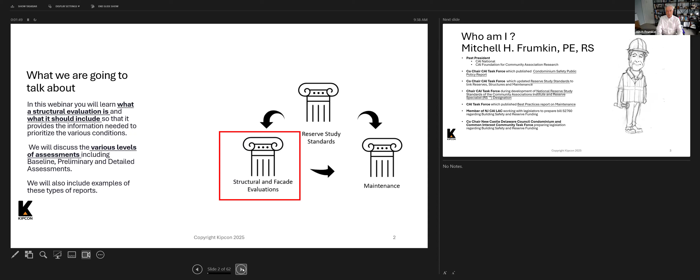Now, this is one of the new little things I added. I don't know if you recognize that, but that's me standing there.

A little bit of my background: I'm past president of CAI National, past president of the Foundation for Community Association Research, which I'm also still on a committee with. When Champlain Towers happened and the collapse took place a few years ago, CAI immediately put together a national task force to develop public policies on condominium safety. I was one of the co-chairs of that, the only engineer actually who was one of the chairs. We involved over 600 people from around the country in developing the public policy on condominium safety, which has been updated by CAI, and I actually chaired it when it was updated. I could talk about that if you like. But when it comes to New Jersey legislation, and legislation in most states that I know of that I've been involved in, it's generally based on the CAI public policy on condominium safety. So it's a very important report, and we will send you copies of it, or you can download a copy from CAI National's website. It's a pretty extensive document having to do with condominium safety, and again, it's the basis very much for the law in the state of New Jersey.

When we put together the public policy on condominium safety, we all came to the conclusion that the reserve study standards needed to be updated to reflect structural integrity as well as maintenance. So the reserve study standards were updated to reflect that. I was one of the chairs of the committee that also updated the standards. If anybody would like a copy of those standards, we can send it to you. Again, you'll see in the legislation in New Jersey, and every other state that I know of, when it talks about reserves and reserve funding, it refers to the CAI reserve study standards as the standard to be used. So there we talk about the reserve studies.

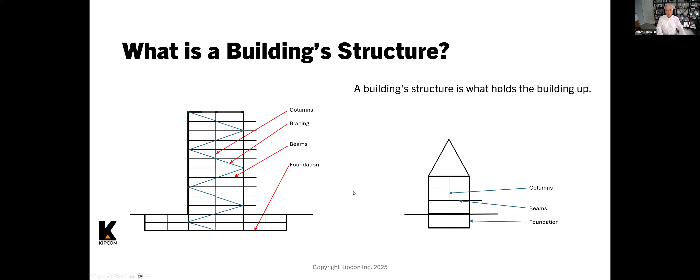There's bracing - these diagonal little blue guys are bracing, and what that does is keep the building from blowing over if the wind blows. So picture the wind blowing from the side - this bracing takes the wind forces down into the ground, these horizontal forces, and into the foundation. The columns are the vertical parts of the structure that hold up the floors, hold up the roof, and hold everything together, bringing the forces down into the foundation. So that's what the building structure is - it's what holds up the building.

The legislation says which buildings - because the big question always comes up is, does my building need to be covered and inspected based on this legislation? The legislation is based on buildings that have a primary load-bearing system, made up of certain material types. This is the actual wording for the legislation: it says that primary means the assemblage of components within a building comprised of the beams, the columns, the bracing, that by being connected to each other, take all the forces - like the weight of the building, the winds and things like that - to the foundation. So that's what it looks like. The primary load-bearing system - I'm going to show you some pictures of what it really means in real life - but it's the things that take the forces to the ground.

One of the things by definition - I'm going to add a little asterisk - is here it says balcony. By definition, a balcony is not part of the primary load-bearing system. But based on the collapse of the balcony in Sea Isle City and the problems with balconies found everywhere, we were able to change the legislation to say that the primary load-bearing system does include the balcony. So even though by definition it's not included, it is included based on legislation. The other thing you see here is the podium deck, and I'll talk about what that is - but the podium deck is included also as part of the primary load-bearing system. So keep in mind this terminology, because this is right from the legislation and right from the standards, which I'll touch on as part of the presentation.

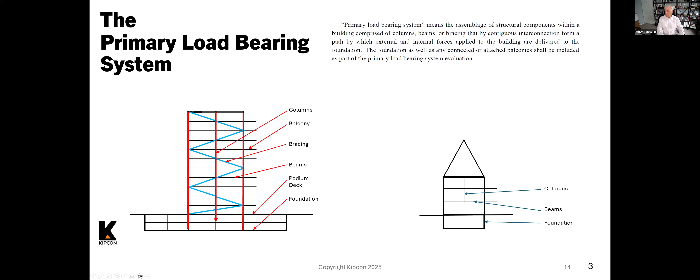Primary load-bearing system is a very important term. Now what does it mean? This is a steel building, and what you see is the walls weren't put on the outside yet, but you're looking at the primary load-bearing system.

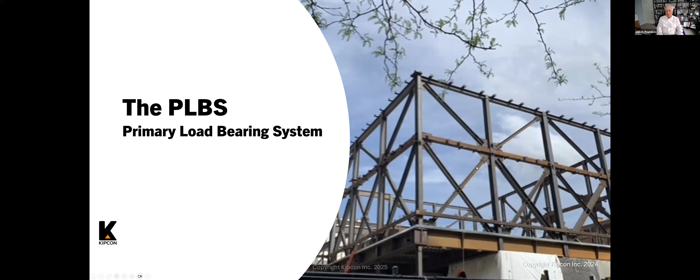You see the beams, the roof, what holds up the roof. You see this beam that holds up the floor. You see the columns in the corner and every 20 feet or something. And then you see the bracing, which is there for the wind load.

The key to a primary load-bearing system and why it's included in this definition is that the primary load-bearing system of the structure is based on the concept that if any one part of it rusts away or falls out or is not there, there's a possibility for a partial or total collapse of this building. For example, if this piece of wind bracing right here was not there and the wind blows, this top part of the column and this section of the building can collapse because just one part of the primary structure is not there.

Same thing with this column. Imagine what happens if this column is gone. This whole corner of the building will collapse. So if this column deteriorates over time and rusts away and loses its strength, there's a possibility that the corner of the building can collapse. And that's why when you're inspecting the primary load-bearing system, this is what you're looking for.

Then there's the beam. If this beam is gone, then the floor will collapse, and it's possible the roof can fall or other things can happen.

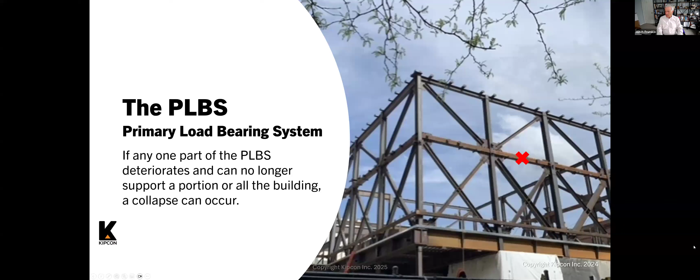But now the definition goes on further. I'm looking the other way because that's how I'm changing the slides now.

It says that a covered building, a building that's included in the legislation that needs to be inspected, is a residential condo or co-op building that has a primary load-bearing system. Remember what I just said? That's comprised of concrete, masonry, steel, or a hybrid structure, including heavy timber, and a building with a podium deck. I'll show you what these all mean in a second, but the key point here is that the type of buildings that are inspected are those that have a primary load-bearing system made up of these materials.

Now, there's always confusion about this, and for the person here from Florida, don't listen to me, but in Florida legislation, if I'm not mistaken, I'm pretty sure it says that the buildings that need to be inspected are 3 stories or higher. If you look at all the standards, which I'll show you, as well as logic, and if the person from Florida has anything to say, feel free to jump in.

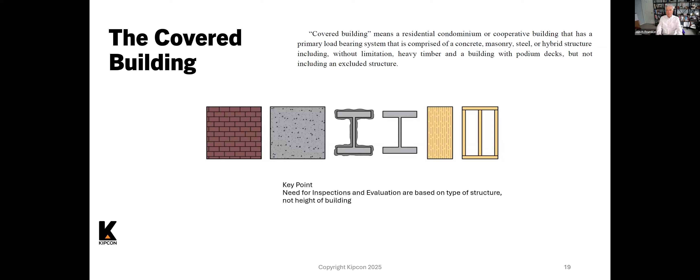The logic is if you're made up of these type of materials and you have a primary load-bearing system and it rots away, the building can partially collapse or collapse. So everything I've seen in every standard is not based on the building height. It's based on the materials of construction. So keep that in mind.

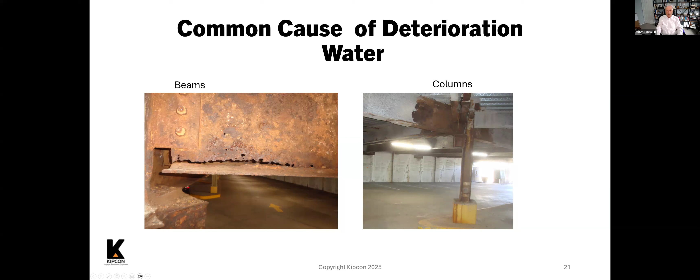Now let's talk about a concrete building. This is what a concrete building looks like under construction. Again, concrete and water don't mix when it comes to deterioration and structural problems. Keep in mind, for those of you who aren't aware, that when you look at a concrete beam such as this - I think this is in a parking garage - these concrete beams and columns are concrete, and encased in the concrete is steel reinforcing, it's called. If that steel reinforcing in the concrete gets wet, what happens is you build up corrosion. As it corrodes, it expands.

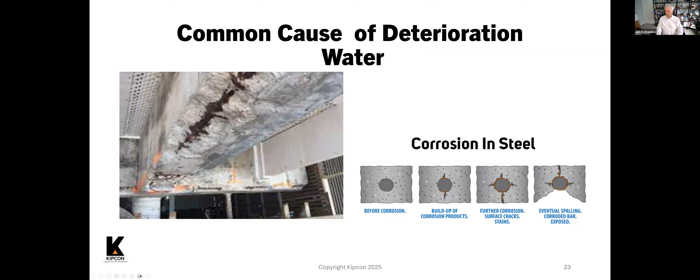As it expands, two things happen. It starts pushing on the concrete, which is called spalling, where it pops out of the corners or wherever because it's rusting. Also, the reinforcing steel loses its strength, so the beam itself is losing its strength. A very common cause of deterioration of reinforced concrete is water. You'll see that that's the common cause of everything. So this is reinforced concrete.

This is what wood looks like on the right when it gets wet and starts deteriorating. The picture on the left I had to add because I took it about two weeks ago. This is a 4 or 5 story building, all steel and masonry, but right in the middle they have a wood column that goes from here all the way up to the top, supporting the building. If you look closely, this wood is splitting from water, expansion, and contraction.

This building has about 20 of these columns, and every one of them is doing this type of thing. You can't miss it, you can see it. I still left my business card, but this is a different part of the country. This is just a picture I took a couple weeks ago to show the types of deterioration in wood.

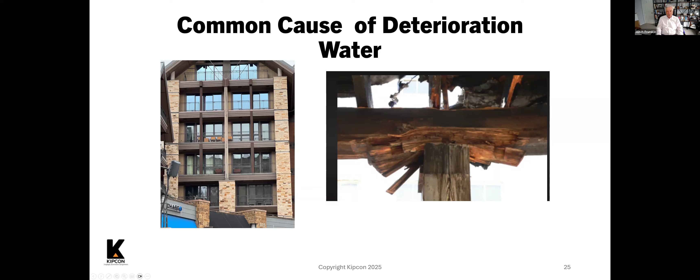Now let's talk about a podium deck. On the left you see an actual building. On the bottom it's reinforced concrete, and on top this is what's called stick framing, which I'll talk about in a second. A podium deck is essentially a deck like this which supports something above, taking all the forces, the weight, the wind load, and whatever out of the top structure and bringing it to the ground through the podium deck and the columns below it.

This question I've heard - as a matter of fact, somebody at Kipcon asked me about it a week ago, about a building Kipcon was inspecting: is this a podium deck? But this is the concept behind it. On the right you can see a little diagram, concrete on the bottom. A lot of times you'll see a promenade deck with pavers and a waterproofing membrane, where you have benches and planters and people sit outside. On top of the podium deck, underneath you often have a parking garage, and on top you have a building being supported by the podium deck. That's the basic concept of a podium deck.

Where do you see this most? You see it a lot in high-rise buildings, in different kinds, but most prevalently where you may have a parking garage. What happens on the podium deck is, on the left, water comes in - it may be brought in by the car if it's an enclosed parking garage, and it may have salts in it. You start seeing corrosion of the reinforcing steel, spalling of the concrete, and deterioration from water.

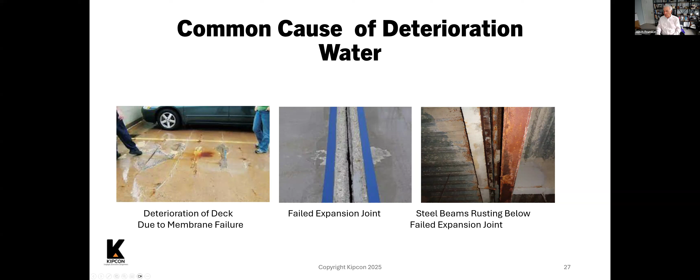Just replacing a closure on an expansion joint may cost you $1,000. Replacing the steel and fixing it will cost you $1 million. So that's because of a failed expansion joint, but it's very critical when you have expansion joints to make sure they stay sealed.

Here's another example. This is a driveway up to a condo, which is a podium deck with stick frame buildings on top - I'll talk about that in a second. There's a lot of expansion joints in that podium deck that water's been getting through, and they haven't fixed them over the years. Look what happens below: the concrete gets wet, starts cracking, and loses its structural strength.

Mitch, before we move into this, I don't know where the appropriate spot for this is, so I'm just going to throw it out - how does a post-tension cable system fit in?

Well, a post-tension cable system - the basic difference is that here you have reinforcing steel that, when you form the concrete and pour it into a mold or form, the reinforcing steel is just there and you don't have to do anything, it just sits there. Post-tensioning means you put in tubes with tensioning cables, and you put tension into those cables after the concrete has been built. By putting tension into the concrete, it's a different way of providing structural strength.

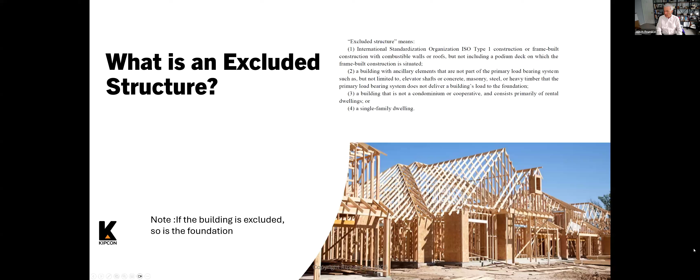But now I'm going to show you something - I don't know if I have another slide about it, so I'm going to go back for a second. If you look at this right here on the left, you have a podium deck made out of reinforced concrete at the bottom, and at the top you have a stick framed building. When it comes to structural inspections and what's included, in this case the bottom podium deck, concrete columns, and everything underneath it are included and do need to be inspected.

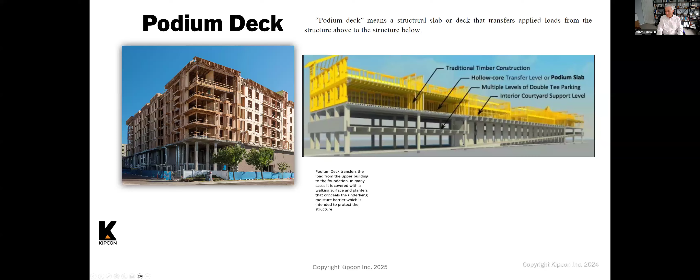What's sitting on top of the podium deck, this stick-framed wood structure, does not have to be inspected. Why is it critical to inspect the bottom? Imagine if this one little column in the corner rotted away - this part of the podium deck would collapse and take the entire building with it. So podium decks are required to be inspected, but the stick frame above is not. That's a question that comes up a lot.

Another term to mention is maintenance. Maintenance is absolutely important, and when it comes to legislation, there are three types. Preventive maintenance is proactive maintenance you do to make sure your structure doesn't deteriorate and that things on your reserve study last their full useful life.

As of right now, and it's not changing, the legislation says that when you do a reserve study for a building - and you have to do reserve studies for every association - the legislation is very clear: the reserve study must include the cost of preventive maintenance. That's in the legislation right now, and that's new to reserve studies.

Deferred maintenance is when you don't do maintenance - you just defer it and don't do it. Corrective maintenance is maintenance you do because you're not doing preventive maintenance, and things happen that you couldn't plan for. So if you're not doing preventive maintenance and you start having problems with the structure, you have to fix it - that's corrective maintenance. Also, as the building ages, you may not be able to plan for certain things happening. It just happens because it's aging, and then you go in and have to fix it.

That's corrective maintenance. The reason I put these here is, like I said, preventive maintenance needs to be included in the reserve study - that's a side point. But the legislation says that if a structural integrity inspection report includes anything having to do with corrective maintenance, something that has to be fixed, it's very clear that the cost of that corrective maintenance needs to be included in the reserve study.

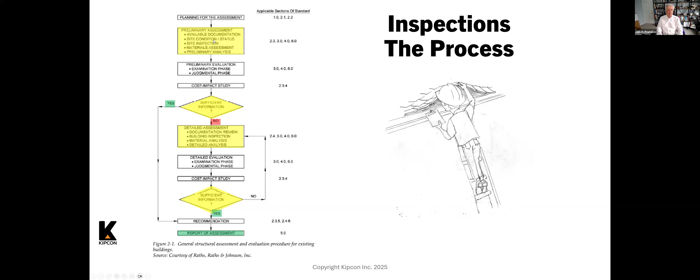The next step is to do a detailed assessment, where you may say to the owner, you have to take off that fireproofing from the steel so we can see what's going on underneath. If you do have sufficient information, you go to the 'yes' and put together the report. But in some cases we don't have sufficient information, and the conclusion in the report is that they have to do a detailed assessment. This is where the process comes from. The initial proposals from firms like Kipcon are based on doing a preliminary assessment, which is what those standards require.

So what is a preliminary assessment? This comes directly from the standard. It consists of a brief walkthrough, meaning you look at every place in the building where you can see where the primary load-bearing system is, either directly or through common elements where it's in the walls. You walk through the structure to identify visually discernible conditions of distress.

If you're looking directly at the structure, obviously you can see it. But if, like I talked about with the fireproofing, it's wet, or if you're walking up a stairwell and you know where the column is and see the sheetrock is covered with water, that's a discernible condition of distress, damage, deterioration, or instability.

It can be used as a standalone review protocol, or to help define a more comprehensive assessment, meaning you go to the next step into the detailed assessment. That's me again standing there for the preliminary assessment. If from the preliminary assessment you see something, then you go into the detailed assessment, and that's the extent of a more comprehensive assessment, which varies depending on what needs to be done.

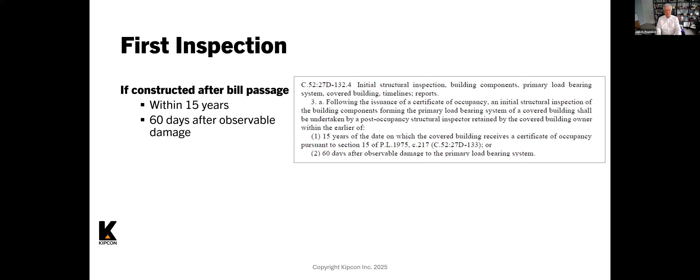If it's a conversion, meaning you've converted, let's say, an apartment complex into a condo, then it's the same time frames within the 15 years.

Very interesting, because when we were originally working on this legislation, Senator Singleton, a very sharp guy, we all agreed, why are we doing this for just condos? The original bill was based on all residential construction, irrespective of whether it was an apartment or a condo. There was so much pushback by the apartment association that the portion having to do with rentals was taken out of the bill. The idea was that if it's a rental, it's one owner, so the owner takes care of their property values and will look at their building and make sure it's in good shape, as opposed to a condo where you have a board of directors and homeowners who may all vote not to do the inspection. They may not do it because they're not going to be living there forever.

So right now, it's only for community associations, but if it's a conversion, then it becomes a condo, it needs to be done.

Once the first inspection is done, the legislation again is very clear. The report is required, which I'll talk about in a second, to say when the next inspection needs to be done based on the conditions that you find, but in no case can it be more than 5 years after the original inspection. So it's within 5 years, or 60 days if you see observable deterioration.

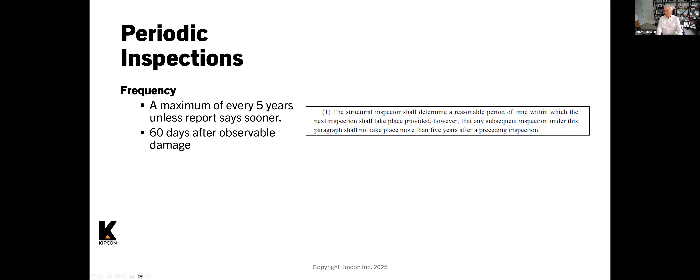What are the reports required to include? On the right are the words where it says it, but it's the condition of the primary load-bearing system, any required maintenance to maintain structural integrity, any required corrective maintenance, and when the next inspection is to be performed. Now you can kind of group the required maintenance and the corrective maintenance together, but required maintenance, you may need to do something to protect something that's structural, whereas required corrective maintenance is when something's already become damaged. So these are the things that are required to be done in the reports.

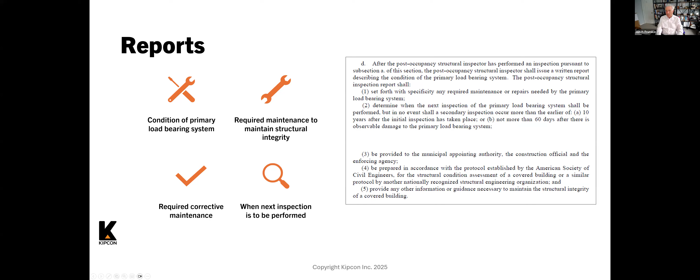What's included in the report? I think this is one of the most important parts of the report: what is the rating system? So when we're going through and looking at a building, each thing you see, and I'll show you some examples, is rated by its condition, whether it's minor, which are visual observations and conditions indicative of progressive deterioration but required to be monitored on a regular basis, or moderate, meaning indicative of rapid progressive deterioration which will require short-term monitoring.

So if you see something in the report, you do the inspection, that's a minor condition, the report would say come back and look at that in 2 years, I'm just picking a number. Or moderate, it might say come back and look at it in 6 months. Severe is, as you would expect, something needs to be done immediately because there's possible inadequacy of the structure. But whether it's this rating system, if you look in the ASCE guidelines, it really doesn't give a specific rating system to use, but your reports should have a rating system from whoever you get them from that indicates what the conditions are.

In the city of Philadelphia, they have certain requirements for facade inspections, and they give you a rating system. But the bottom line is, whoever's doing your report, it should include a rating system to show you what the condition is and what needs to be done.

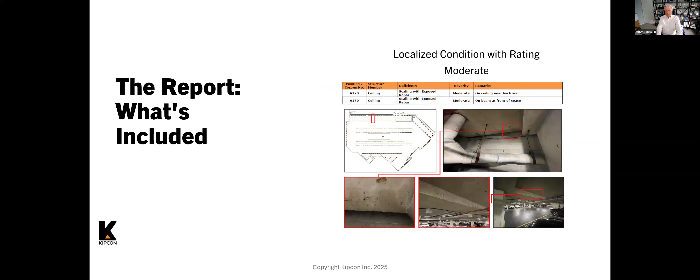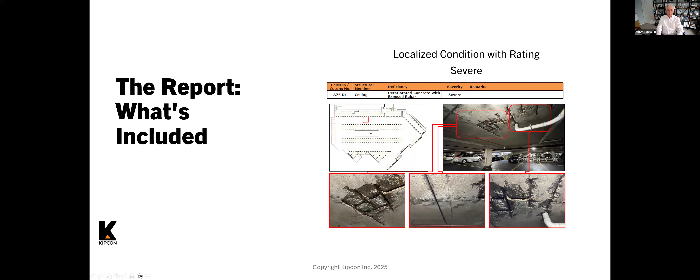You can see what's happening here, that the reinforcing steel in the concrete got wet, it rusted, it expanded, and it popped out the concrete.

The reports that are prepared are required to be provided to the municipal authorities by the engineer. So when the report is done, it needs to be sent by the engineer, not by the board, to the municipal authorities, which is what Kipcon does with all the reports, and made available to residents on request in the community. These are the specific words of what needs to be done with the report.

Who does the report? Very clear - it has to be done under the direction of a licensed professional engineer. Keep in mind, this is legislation: an engineer licensed by the state with the same qualifications required of an engineer under contract with the enforcing agency. So it has to be the same type of licensed engineer that the enforcing agency would use to inspect. Just because somebody is a licensed structural engineer does not mean they have the experience to inspect an existing building - it's a totally different world, a totally different type of thing. Just because a structural engineer can design a new building does not mean they also know how to inspect an existing building. So make sure when you're hiring somebody that they have the qualifications to do that.

One of the most critical parts of legislation to me, which doesn't necessarily deal with how to do the inspections, is that in a lot of buildings it says in the bylaws that in order to do a special assessment, there needs to be a vote of the membership. If I'm not mistaken, in Champlain Towers they wanted to do a special assessment to fix it - there was a vote of the membership, and it might have been voted down. But the legislation in New Jersey and the public policy from CAI says if it's a safety issue, there does not have to be a vote of the membership in order to do work.

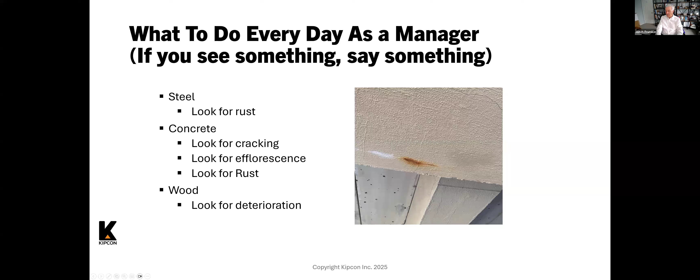The next step is that this water is going past the reinforcing steel, and the efflorescence is now turning into rust stains. If you see this, you should get somebody in here to take a look at it, because the structural engineer will be able to tell you how much of an impact that rust is having on the structure.

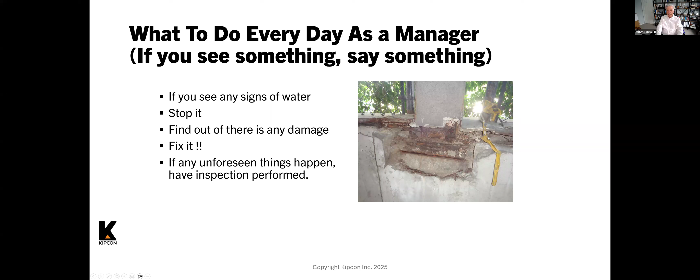If you see signs of water, you need to stop it. In this case, we were seeing rusting in the wall, took it apart, and found that the column underneath was rusted. I talked about this before: you should never put tarps in buildings underneath podium decks to keep water from getting on cars, because what you're missing is how the structure is rusting away.

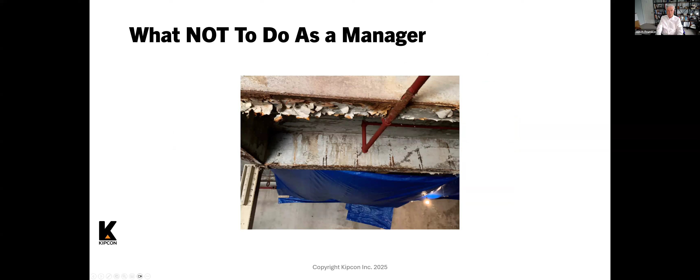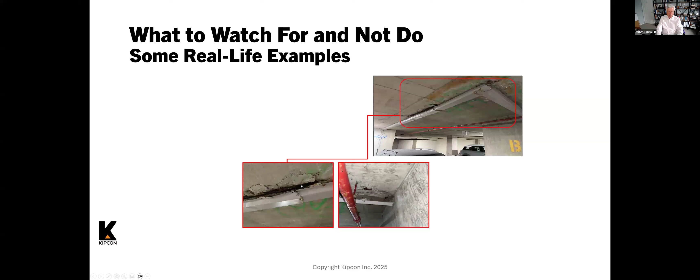Here's an example of putting gutters and downspouts in a parking garage between joints. Look what's happening. You can see that the reinforcing steel is rusting away, and you're making it even worse because you're holding the water there.

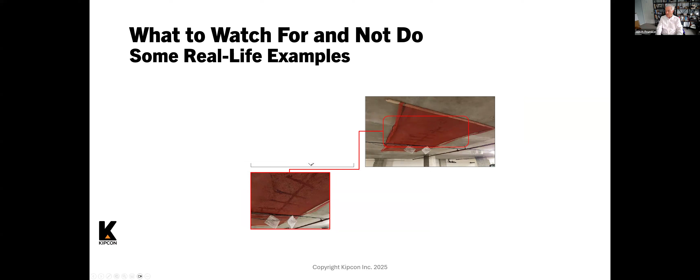This is an interesting one where they put a tarp underneath where the reinforcing is rusting and the concrete's dropping, not to fix it, but just to keep the concrete from falling on cars. You can actually see what's going on behind it. Again, tarps to redirect water. This is a gutter and downspout.

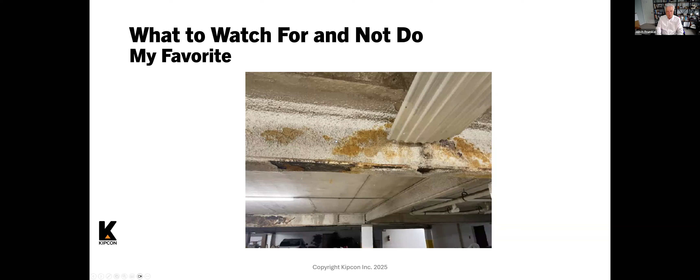This is one of my favorite ones. If you've been in the seminar before, you know I like this one because they put in this piece of, I guess, corrugated siding to keep the water from dripping on the cars. It's directed directly at the steel beam, rusting the steel beam away, and you can see here's the fireproofing. What does it look like when the steel's rusting behind? You can see the rust.

Now I'm going to talk. Does anybody have any questions about the structural part? Because I was just going to take a couple minutes to tell you about the legislation changes with reserves. Chelsea, or anything else? Yes.

Yes, there are some questions. So first, should I be concerned if there are multiple railings getting loose on my high-rise balconies, or is that just standard repairs and replacements?

Well, first of all, the railings are not part of the structural integrity inspection, although the balcony is. A lot of times the railings go down into the concrete, which is called a pitch pocket, and that's how they're connected. What happens is the water gets into that pitch pocket, rusts the reinforcing, and the corner of the balcony falls out. It's a very common problem. Your railings may be loose if they're going directly into the concrete, because the water's getting in there and loosening up the concrete, so the railing can move if it's a concrete railing. It's hard to diagnose without seeing a picture, but if you want to send one, I'd be happy to take a quick look at it.

Next question: a stick frame building with two walls of cement block masonry abutting against neighboring buildings - is inspection needed? I would have to see a copy of the architectural or engineering drawings to say. If it's a stick frame building, sometimes this wall may just be a firewall and not a structural wall. You see that a lot between units in a multifamily building where it's a stick frame building. If it's a stick frame building, like townhouses with a firewall made out of masonry between them, it's not necessary to inspect it. As a matter of fact, the legislation says that as part of a stick building, if there are ancillary things made out of those materials but they're not structural in nature holding up the building, then the building is not required to be inspected.